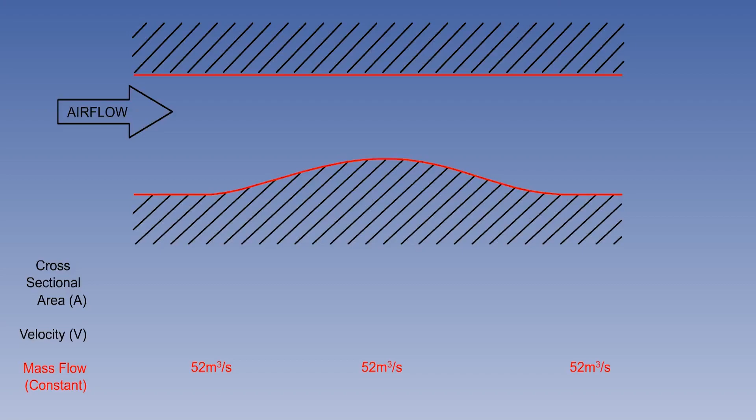This is the basis of the principle of continuity, and to demonstrate its effect on aerodynamic theory, we will consider a stream of air flowing through a tube which has a reduced cross-sectional area in the middle. The air's mass flow, or mass per unit time, will be the product of the cross-sectional area of the tube, A, the velocity, v, and the air density, ρ.

The mass flow will remain constant at all points along the tube. The equation of continuity is A times v times ρ equals constant.

Because air is a compressible fluid, any pressure change in the flow will affect the air density. However, at low subsonic speeds, less than Mach 0.4, density changes are insignificant and can be disregarded.

The equation of continuity can now be simplified to A times v equals constant, or, when we rearrange it, velocity equals constant divided by area.

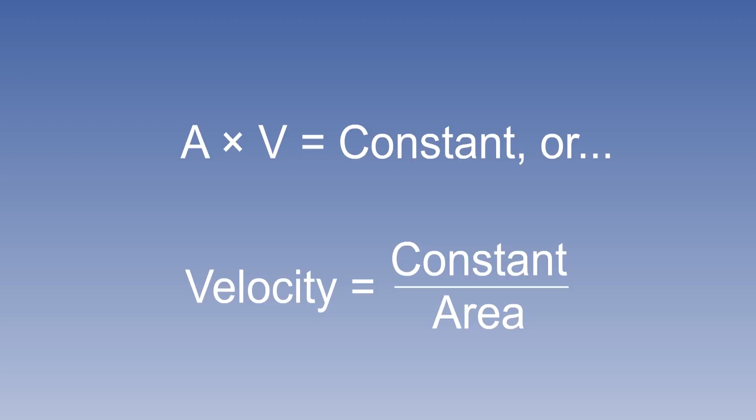Because the mass flow must remain constant, it can be seen from the equation of continuity that the reduction in the tube's cross-sectional area results in an increase in velocity, and vice versa.

The equation of continuity enables the velocity changes of airflow around a given shape to be predicted mathematically for speeds below Mach 0.4, which is around 260 knots at sea level.

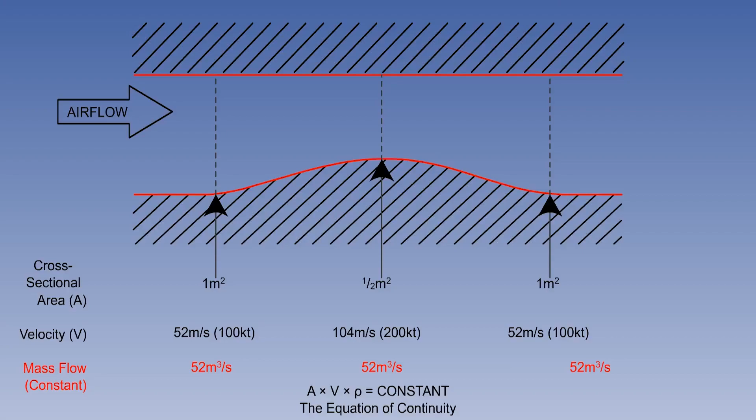Associated with the principle of continuity is Bernoulli's theorem, propounded by 18th century Dutch-Swiss mathematician Daniel Bernoulli. His theorem states that, in the steady flow of an ideal fluid, the sum of the pressure and kinetic energy per unit volume remains constant, or, more concisely, the sum of the energies present remains constant.

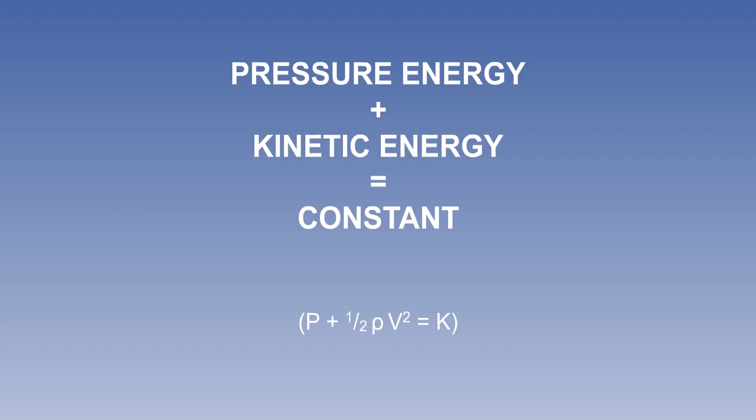In this context, an ideal fluid is both incompressible and has no viscosity. The theorem can be expressed as pressure plus kinetic energy equals constant, or P plus half rho v squared equals K. Let us consider a mass of air at ISA conditions, moving at 100 knots or 52 meters per second.

Static pressure is 101,325 newtons per square meter. Density 1.225, giving a dynamic pressure of 1656 newtons per square meter. Pressure energy 101,325 plus kinetic energy 1656 equals a constant 102,981 newtons per square meter.

Because the velocity of the airflow at the throat has doubled, its dynamic pressure has risen by a factor of 4, and the static pressure has decreased. But the total pressure, the sum of static and dynamic, has remained constant. This constant can be referred to as total pressure, stagnation pressure, or pitot pressure, according to context.

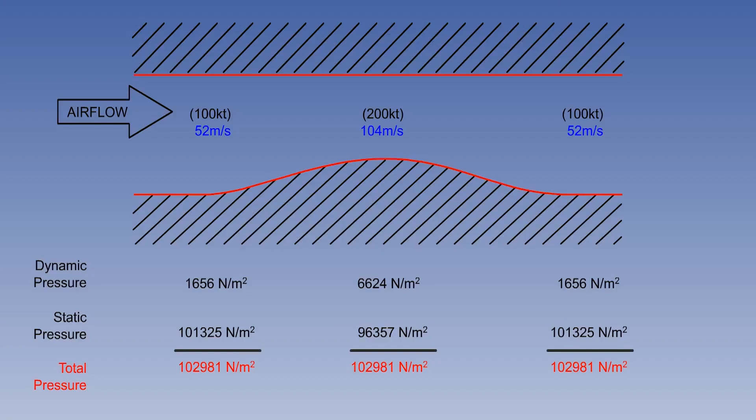The tubes used in the diagrams just shown are used only to demonstrate the principle of continuity and Bernoulli's theorem, and are not devices which could make an aeroplane fly.

However, an aerodynamic force to oppose and exceed the weight of an aircraft can be generated by a specially shaped body called an aerofoil. The airflow over the top surface of a lifting aerofoil will be at a greater velocity than that beneath, so that the pressure differential will result in a net upwards force per unit area. The bigger the surface area, the larger the force generated.

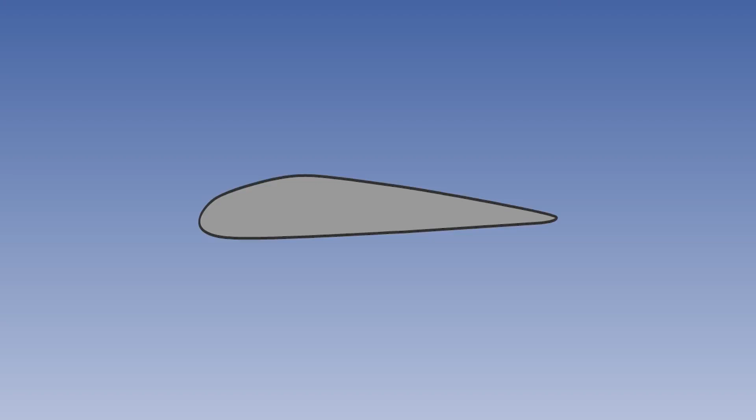Next, we shall see the similarity between the flow over the aerofoil and the flow through the tube used in describing the principle of continuity and Bernoulli's theorem, and that these fundamentals still apply to aerofoils.

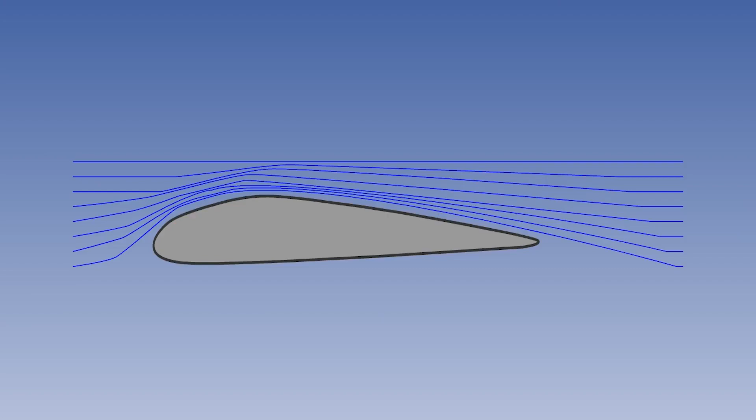A streamline is the path followed by a particle of air in a steady airflow, and one streamline cannot cross another. When they are shown close together, it indicates increased velocity, and when wide apart, decreased velocity.

When streamlines diverge, it indicates decelerating airflow and the associated rise in pressure. And converging lines, acceleration with decreasing pressure.

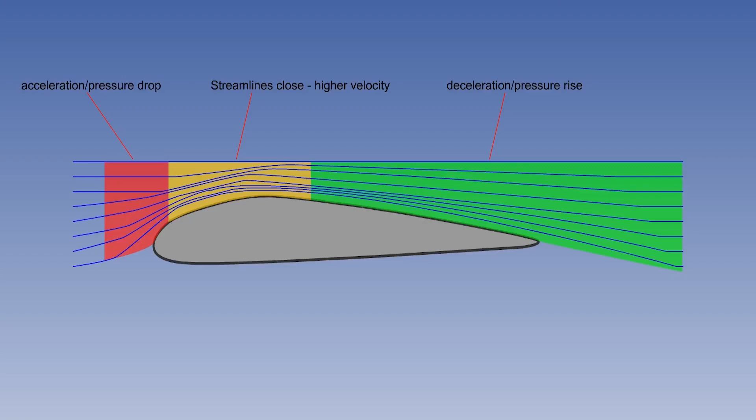A stream tube is an imaginary tube made up of streamlines. There is no flow into or out of the stream tube through the imaginary walls, only a flow along the tube. This concept will help you to visualize the airflow around an aerofoil.

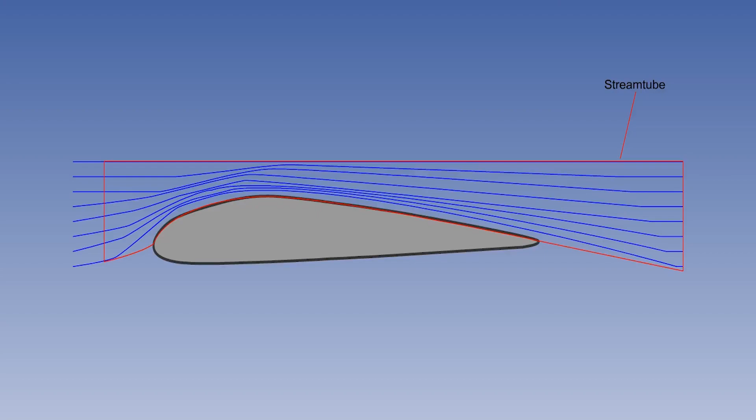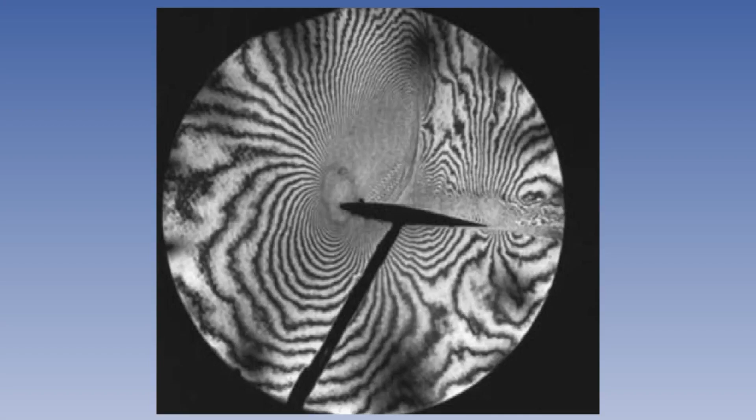To grasp the basic principles of aerodynamics, you will need to understand the principle of continuity and Bernoulli's theorem. We can summarize the relevant elements as follows.

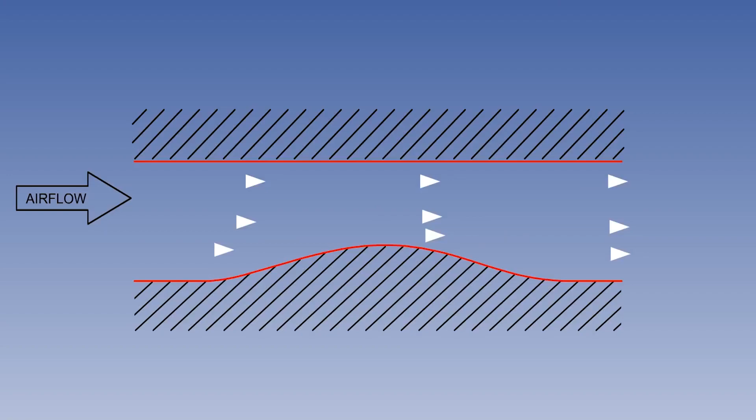By the principle of continuity, air accelerates when the cross-sectional area of a streamline flow is reduced, and decelerates when it increases. By Bernoulli's theorem, if a streamline flow of air accelerates, its kinetic energy will increase and its static pressure will decrease.

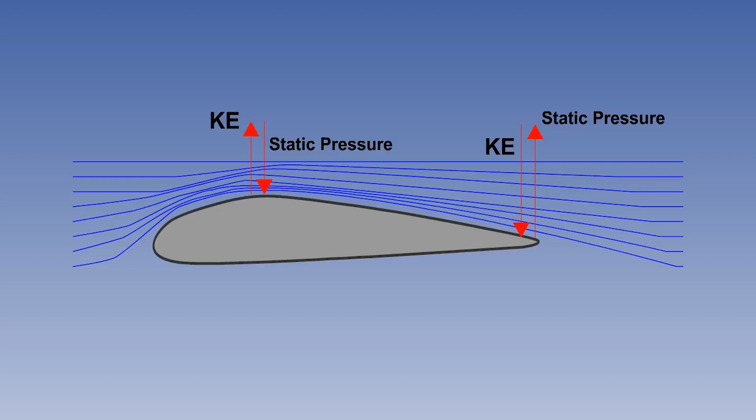Conversely, if air decelerates, the kinetic energy will decrease and the static pressure will increase. Additionally, it should be remembered that these pressure changes will not affect air density at speeds below Mach 0.4. By using these effects, an aerofoil can generate the aerodynamic forces required for flight.